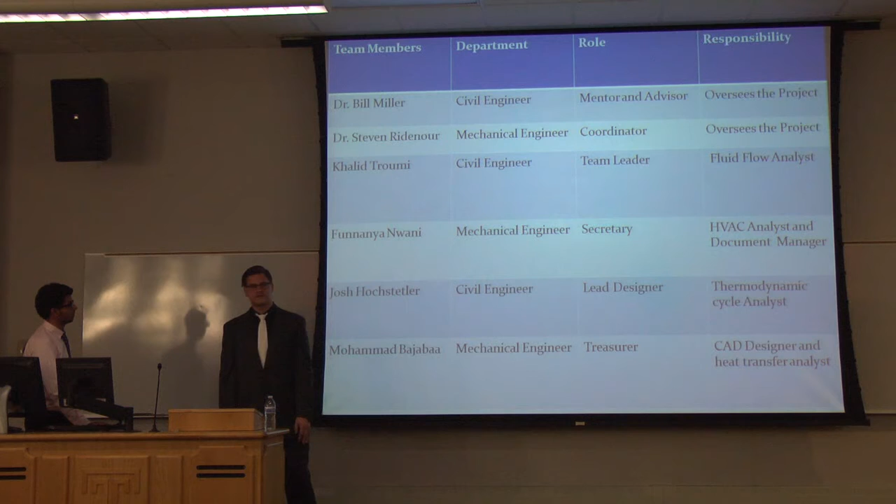One of the main challenges we've found with people who have residential driveways is the accumulation and formation of ice and snow. This normally leads to reduced traction for tires and for people walking on the driveway, and accidents happen—people can fall and injure themselves. So we decided that a heated driveway was the best solution for this problem.

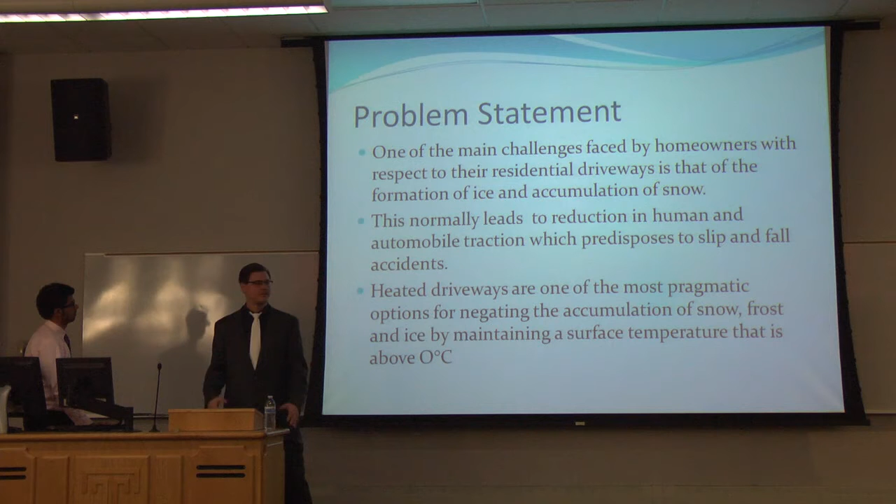We came up with a few candidate solutions, the first of which was a solar powered heated driveway system. The problem we found was that implementation is very costly, and when the solar panels aren't in direct sunlight, they don't have a very high efficiency.

The next solution we came up with was a chemical deicer operation. The problem we found was that this solution still required manual removal of the snow, even though it was supposed to solve that, and it also required spraying chemicals, which isn't environmentally friendly.

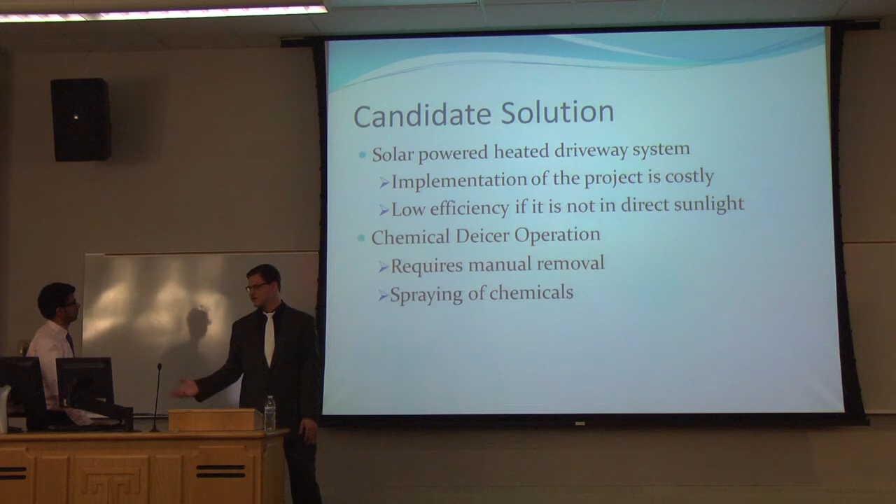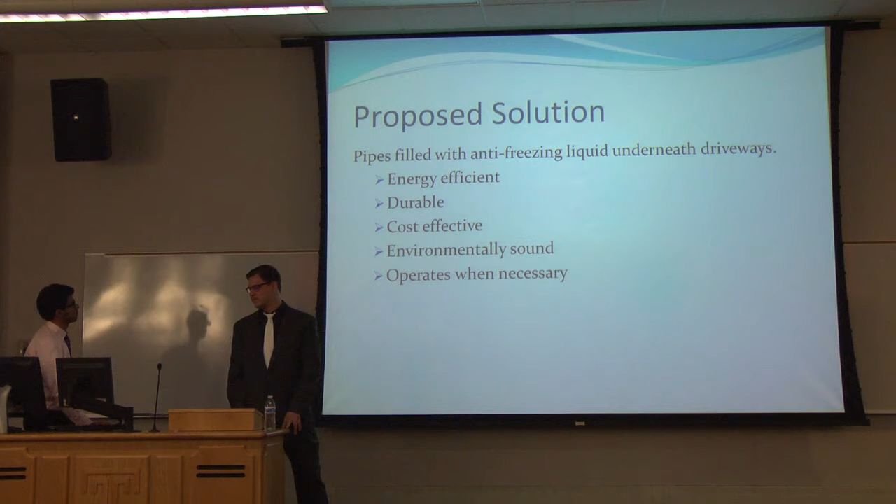So the solution we came up with was to integrate a system of pipes underneath the driveway. It would circulate a mixture of antifreeze solution using propylene glycol and water, circulating around underneath the driveway. It's energy efficient, durable, cost effective, environmentally sound, and it operates only when necessary.

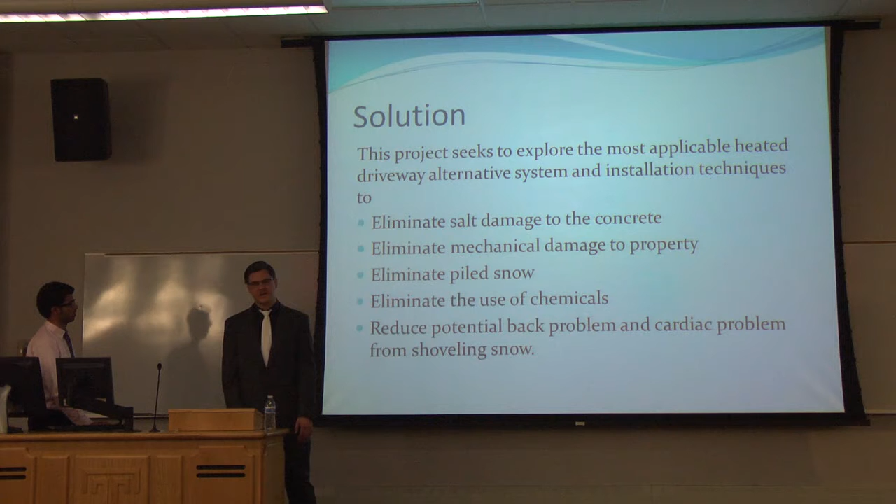This project seeks to explore the most applicable heated driveway alternative system and installation techniques. It eliminates salt damage to the concrete, eliminates mechanical damage to the property, eliminates piled snow and the use of chemicals, and reduces the potential for back problems and cardiac problems from shoveling snow.

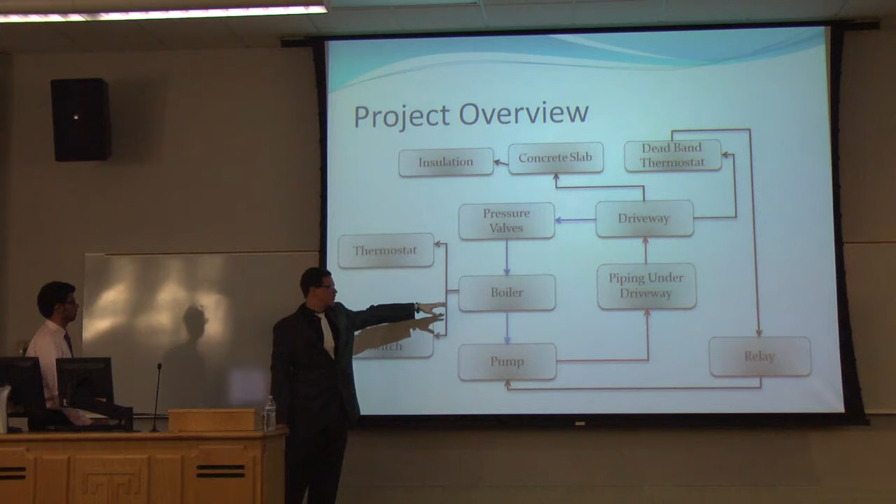This is a project overview. The whole system starts when you turn the power on—that's the main power for the whole system. Then you have the thermostat, which controls the temperature for the boiler, which heats up the fluid and sends it out throughout the system.

We also have a deadband thermostat in our system. This thermostat turns the whole system on when it gets to 31 degrees Fahrenheit and turns the whole system off when it gets to 35 degrees Fahrenheit. The reason we decided to put this into our system was so you don't have to worry about turning the system on and off yourself.

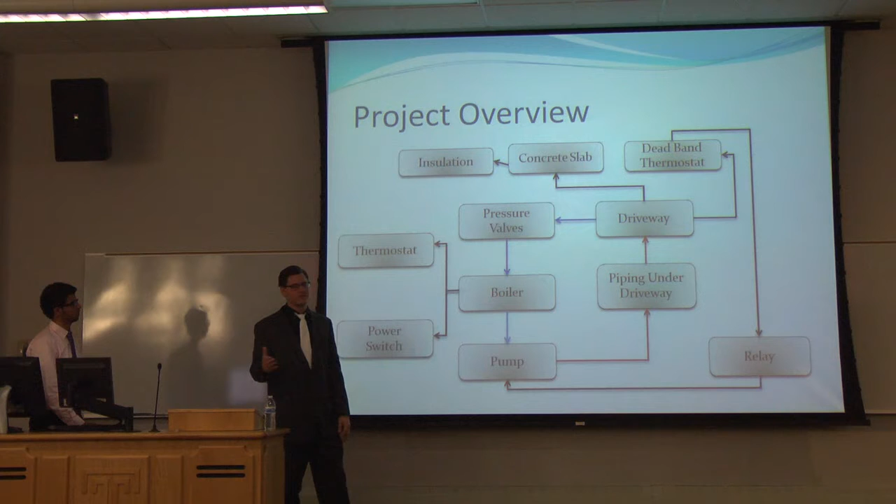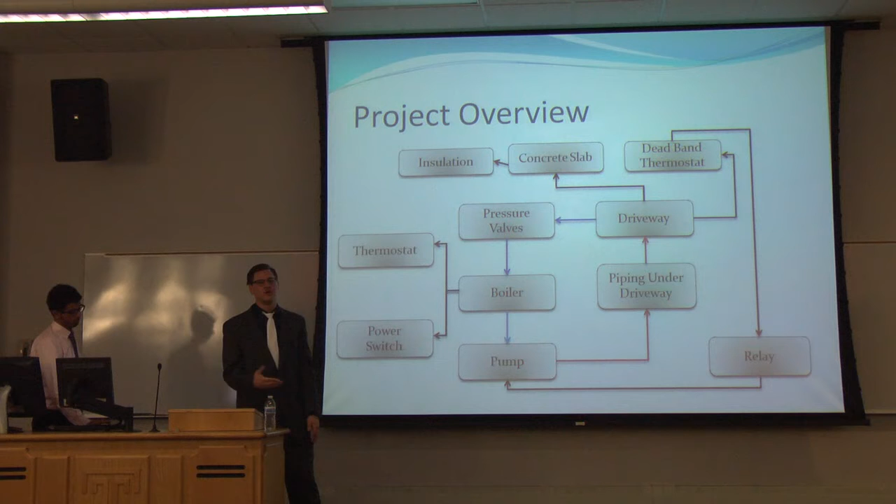So if you're sleeping and it snows overnight, it'll turn on because it has to be below freezing for that snow to stick, and then it'll melt the snow. You don't have to worry about waking up early to shovel yourself out of your driveway, or if you're at work, coming home and dealing with snow or ice on your driveway.

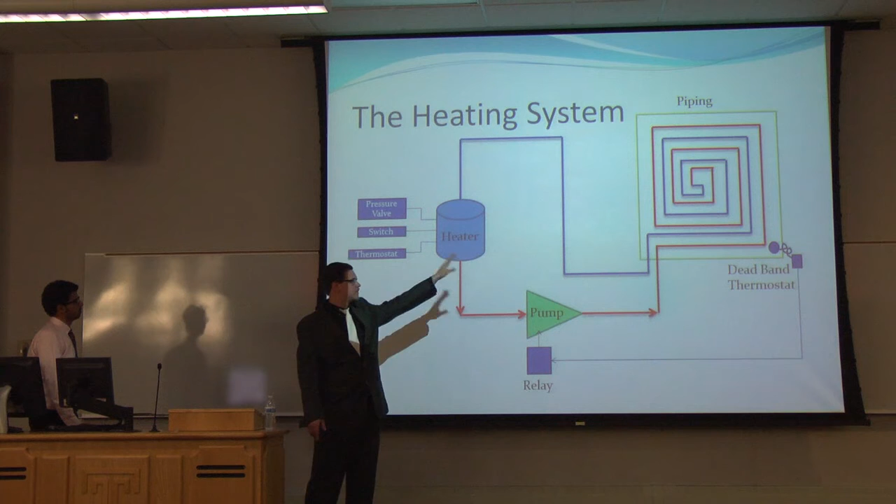This is another overview with a more detailed idea of what we're going to put underneath the driveway system. You're going to have the boiler pumping the heated propylene glycol and water solution out into the system, and it's going to circulate around, then once it gets to the center, it's going to return back.

We decided to go with that layout for the pipes because it's the best way to evenly distribute the heated solution throughout the driveway. It doesn't miss any spots, which was a problem we found with some of the other pipe layouts.

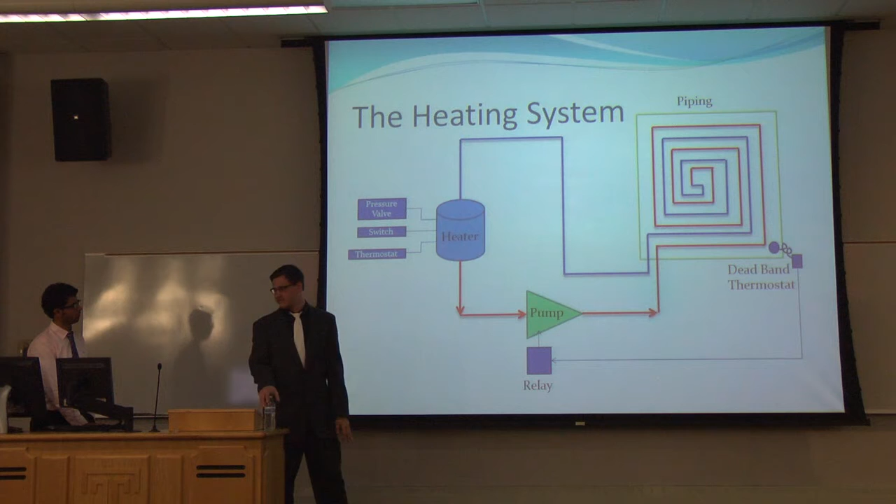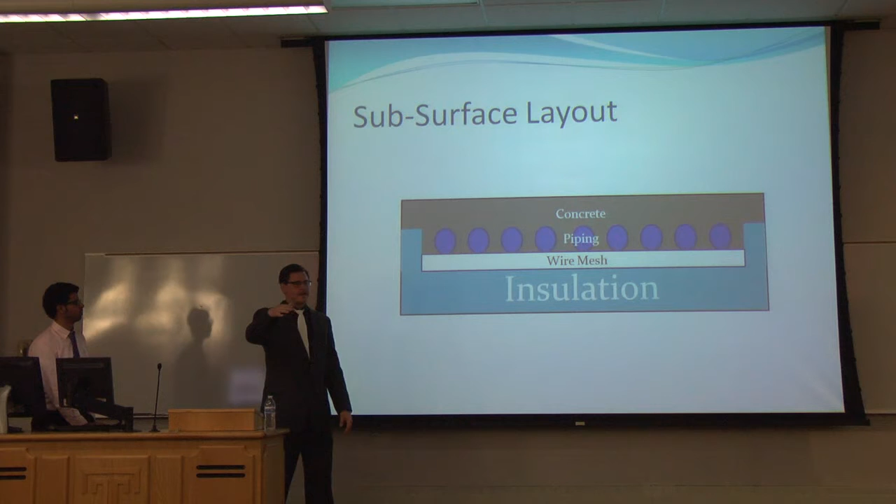This is a subsurface layout, if you were looking at it face on. On the bottom and sides, you're going to have a layer of insulation, and on top of that, wire mesh, and then the piping is going to be laid on top of that. And on top of everything, you're going to have the concrete, which would be the driveway surface.

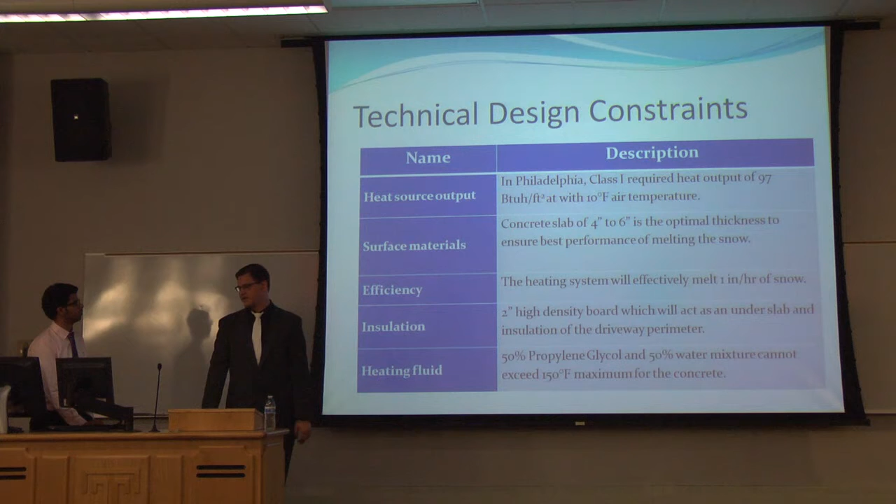For our technical design constraints, we had a heat source output, and for that, in Philadelphia, a Class 1 required heat output of 97 BTUs per feet squared, with 10° Fahrenheit air temperature required.

Our surface materials are going to be a concrete slab of 4 to 6 inches. This is the optimal thickness to ensure the best performance of melting snow. The heating system will effectively melt the snow at 1 inch per hour.

The insulation is going to be a 2-inch high-density foam board, which will act as an under-slab and side insulation for the driveway perimeter. The heating fluid is going to be a 50% propylene glycol and 50% water mixture, and this cannot exceed 150 degrees Fahrenheit, so it won't damage the concrete or the system itself.

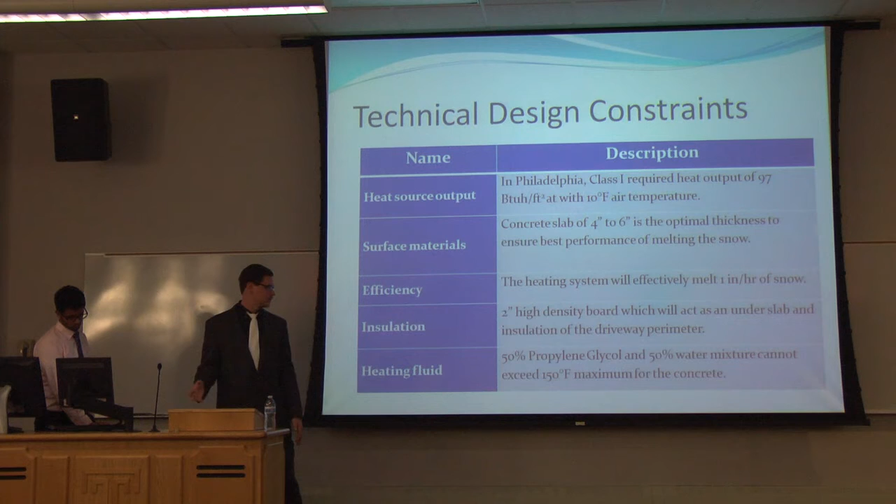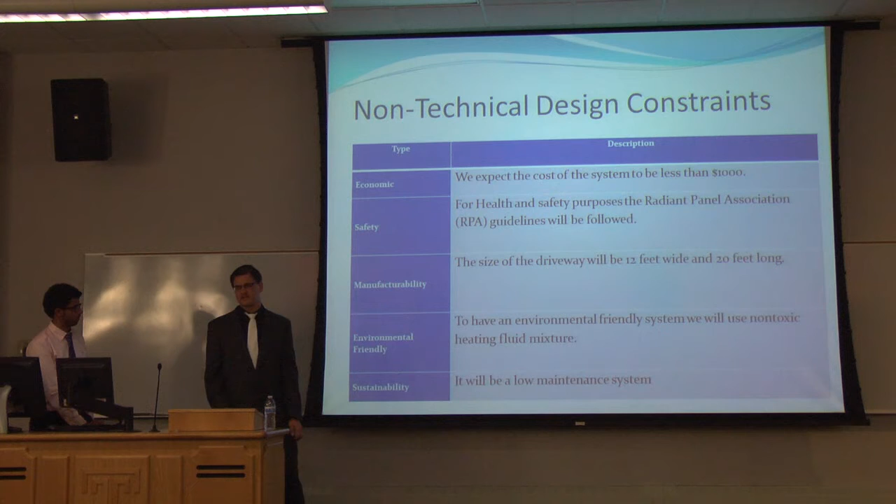For manufacturability, the size of the driveway will be 12 feet by 20 feet, and we chose these numbers arbitrarily. This driveway system can be redesigned for any width or length. It's going to be environmentally friendly, using a non-toxic heating fluid mixture, and for sustainability it will be a low-maintenance system.

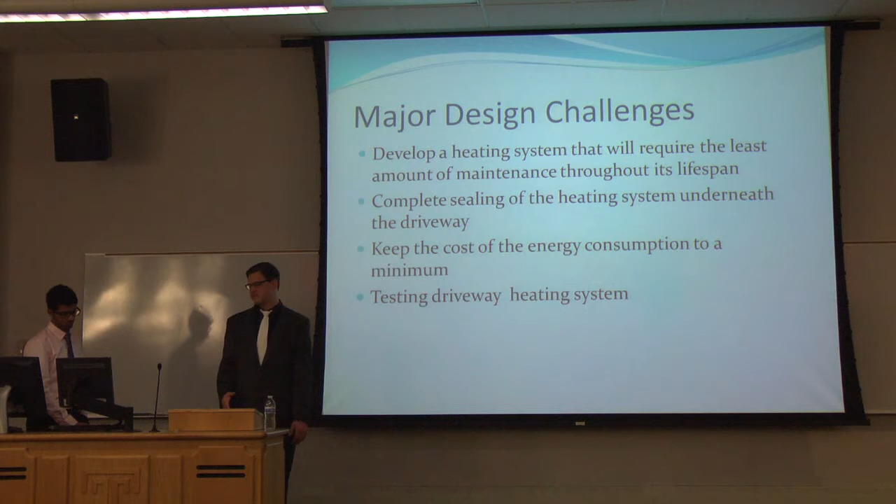The major design challenges we came up with while designing it were to develop a heating system that would require the least amount of output, or the least amount of maintenance throughout its lifespan, complete the sealing of the heating system underneath the driveway, keep the cost of energy consumption to a minimum, and find a way to test the heated driveway system.

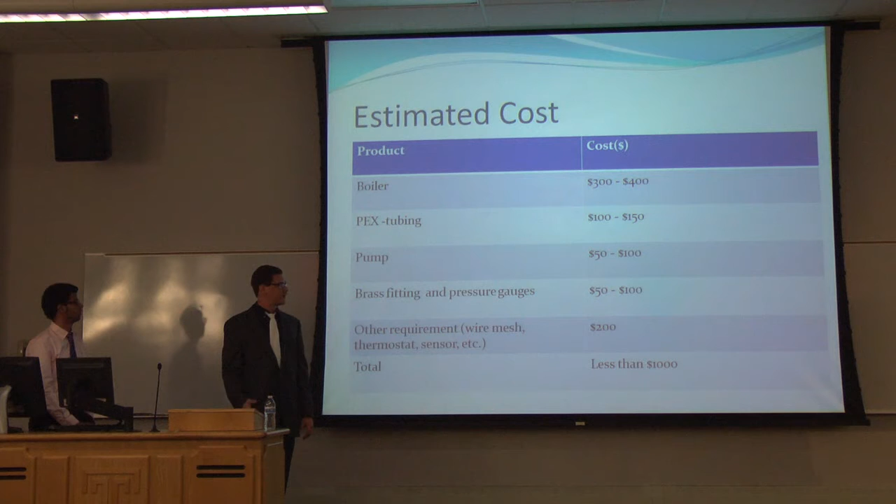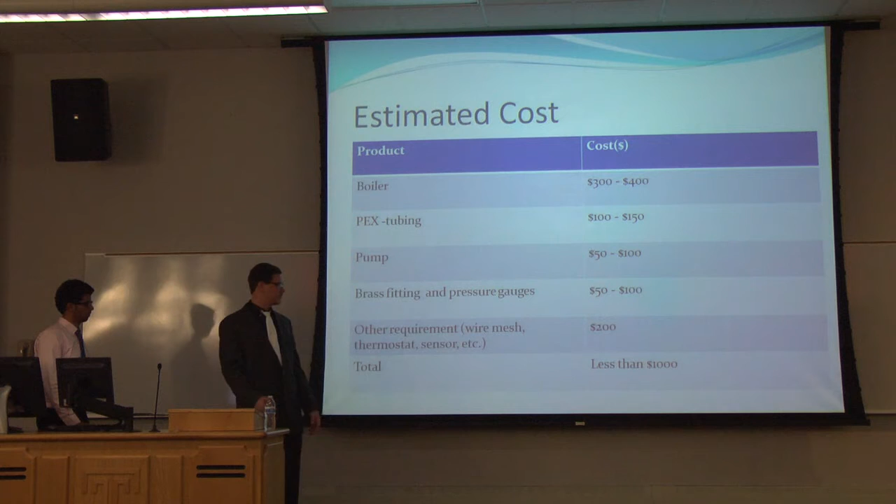This is just our estimated cost. Our boiler we estimate to be anywhere from $300 to $400. The PEX tubing, which we lay out underneath the driveway, would be anywhere from $100 to $150. The pump we found to be anywhere from $50 to $100. The brass fittings and pressure gauges would be anywhere from $50 to $100. And other miscellaneous expenditures we may need would be around $200, which totals out to be less than $1,000.

So for our approach, we found an industry-used manual that other companies use when designing their heated driveway system. It's based on the ASHRAE handbook, which is what's used. It's got a bunch of guidelines and things for systems such as this one.

The first thing we had to do was determine an outdoor temperature. For this, we decided to use 10 degrees Fahrenheit, wind speed of 10 miles per hour, surface temperature of 35 degrees Fahrenheit, and a differential temperature of 25 degrees Fahrenheit. The differential temperature is just the temperature at which the fluid is supplied to the system as opposed to when it returns to the boiler.

These values gave us a heat flux of 95 BTUs per hour per feet squared, a supply fluid temperature of 126 degrees Fahrenheit, and a 12-inch on-center tubing distance.

The total area for the system we said would be 12 feet by 20 feet, which gave a 240-foot squared area. To calculate the total BTUs per hour, we multiplied that by the heat flux, which gave 22,800 BTUs per hour, the minimum output our boiler would need to put out.

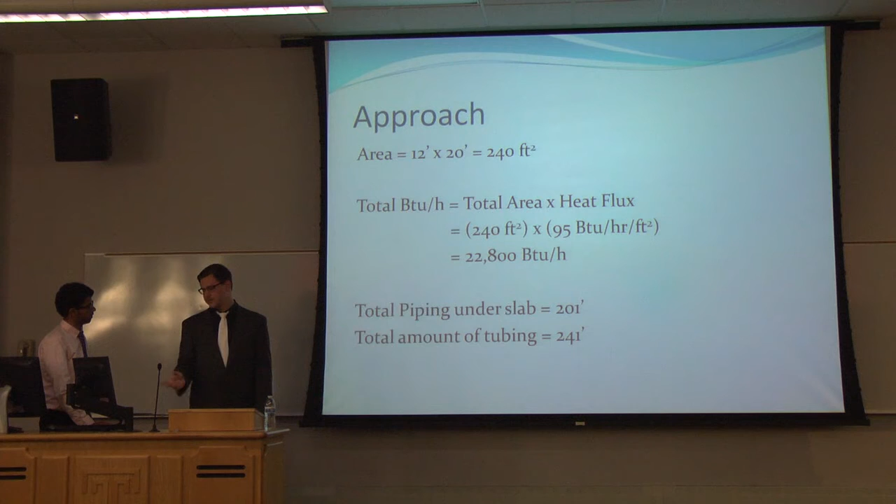So then from the book, which we didn't realize at the time but was essentially what we had just done previously, we calculated an active loop length of 200 feet, only a foot off from the total length of tubing we had calculated, which was 201 feet. This gave us a number of loops of one loop and a total header length of 20 feet, which we didn't realize at the time should have been multiplied by 2, since it was 20 feet going in and 20 feet coming back out. So the book would have given us a total loop length of 240 feet.

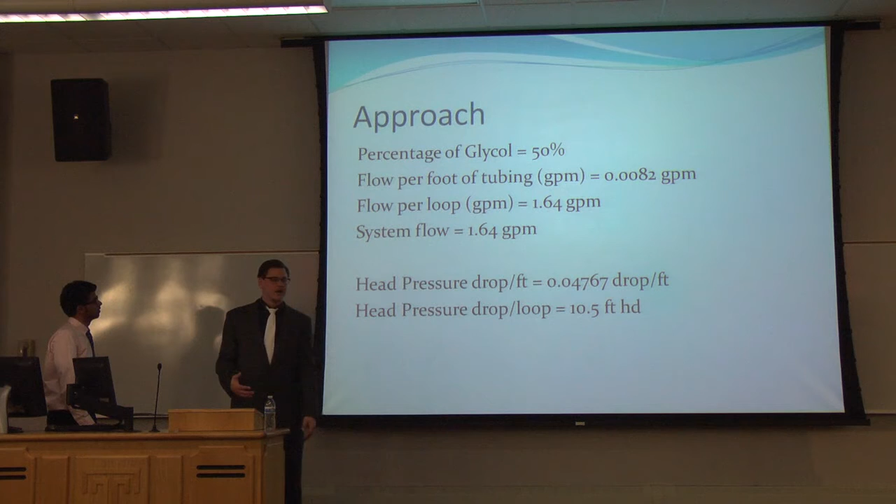We used a 50% glycol solution because the way it mixes with water gives a better temperature for us to use.

For the flow per foot of tubing, we calculated 0.0082 gallons per minute. The flow per loop would be 1.64 gallons per minute, and the total system flow would also be 1.64 gallons per minute.

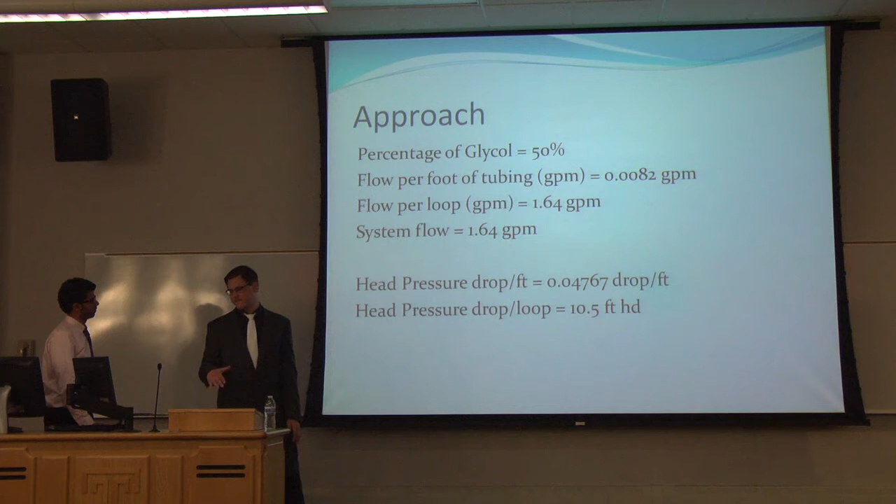The head pressure drop per foot would be 0.04767 per foot, and the head pressure drop per loop would be 10.5 feet of head.

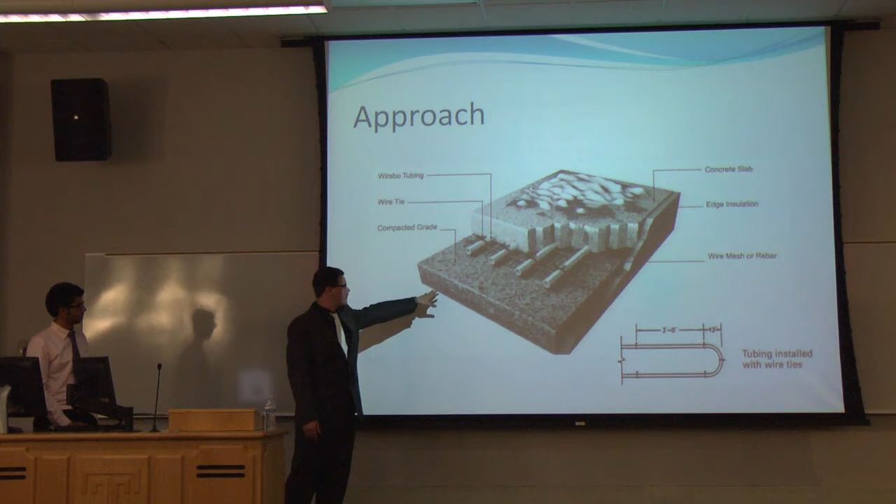This is a more detailed picture of the subsurface layout we had. You can see the ground, then on top of that the insulation, then the wire mesh with the tubing tied down to it, insulation on the sides so you don't lose heat out the side, and then the concrete laid on top.

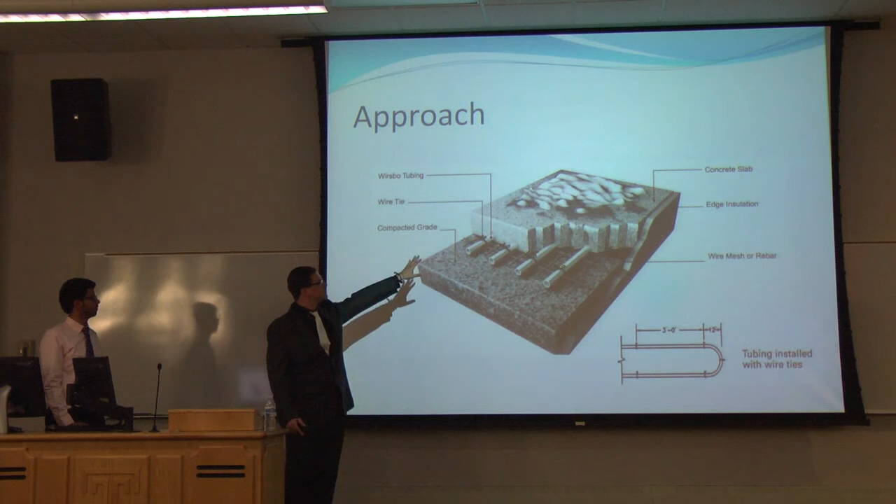For summary, for Senior Design 1, we finalized our design layout, got more familiar with each part of the system, completed most of the required calculations, and came up with a full budget analysis.

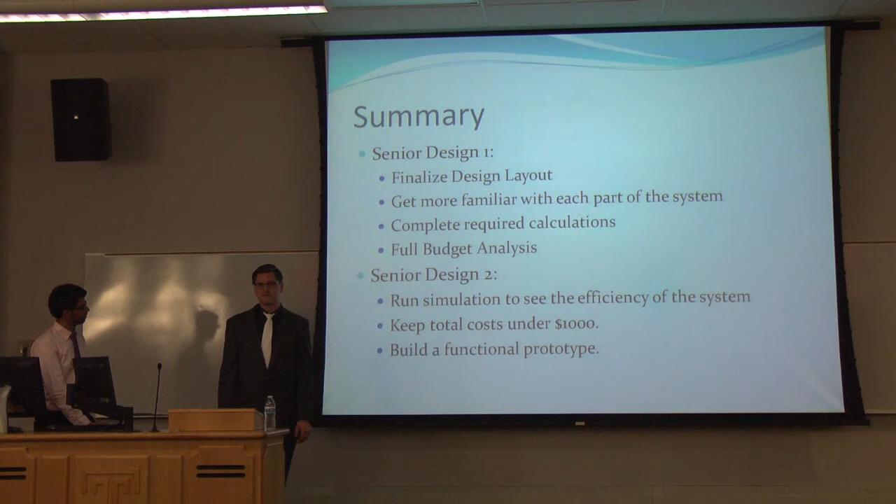Over the summer and for Senior Design 2, we plan to run a simulation to see the efficiency of the system, keep the total cost under $1,000, and build a functioning prototype of the system. Thank you for your attention.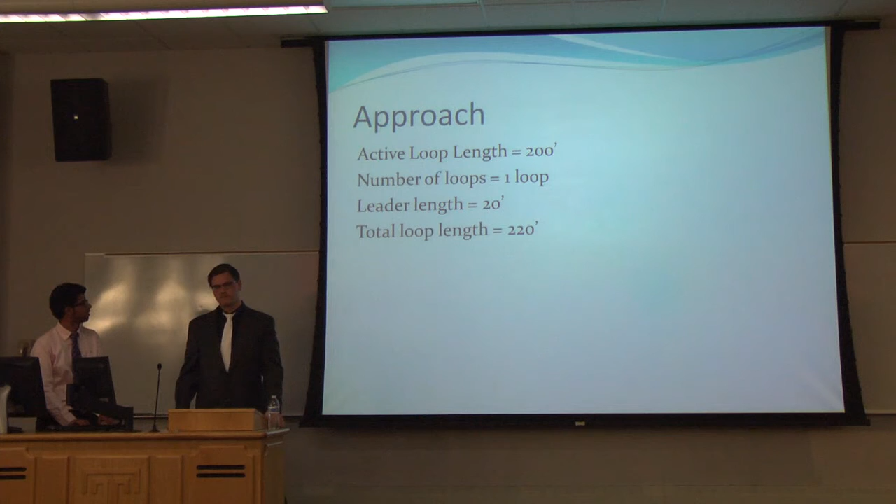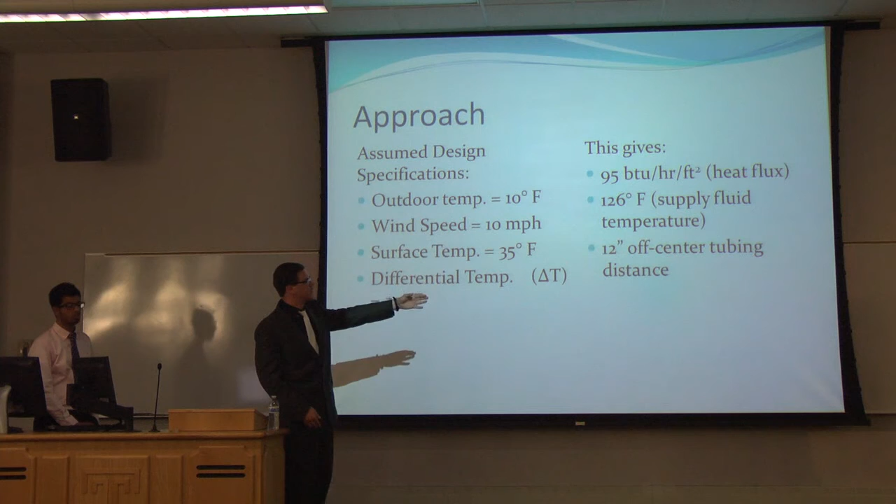Regarding the calculations on temperature: the surface temperature was 35 degrees Fahrenheit, and the fluid inside was going to be 126 degrees Fahrenheit coming into the system, with a differential bringing it back at 101 degrees.

How did we come up with 35 degrees given 126 degrees Fahrenheit? We just picked that number arbitrarily. Since the freezing temperature is 32 degrees Fahrenheit, we had to choose something above that to melt snow, so we chose 35. The manual we used said 34, but we used 35 to give a little extra margin. It wasn't a calculated number, just one we picked.

When you have a given fluid temperature of 126 degrees Fahrenheit and a 4 to 6 inch slab, what is the temperature drop through the slab? To be honest, I'm not really sure. The manual we used was based on the ASHRAE handbook, which uses a lot of advanced thermodynamic equations we're not fully familiar with.

Another point raised: surface temperature depends on fluid temperature and flow rate. If your flow rate is low, the surface temperature may end up much lower than what you want, or if too high, it could end up much higher. Without the right equations, you may not achieve the control you need. We'll take a look at that.

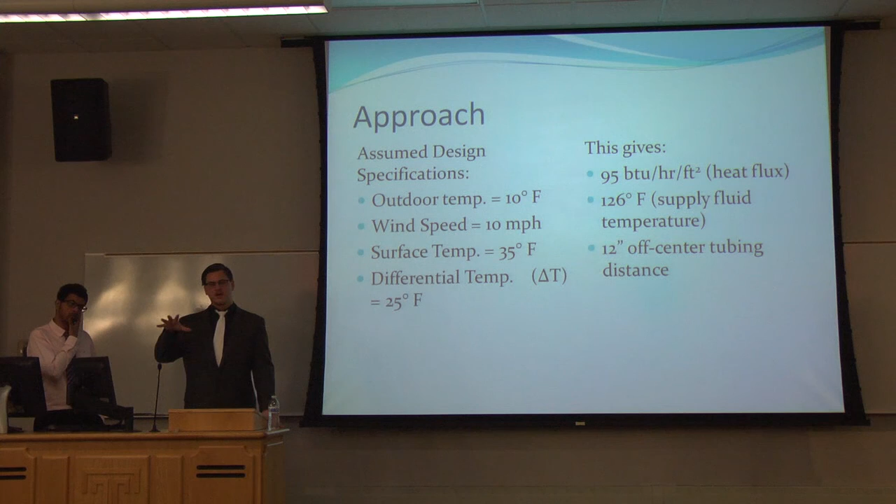It depends on where you put it. For our purposes, we just designed it as if it was right there, didn't need anything else, but it will be part of the calculations if you want to find out the overall system efficiency.

Any questions? We still have 2 minutes. Okay, I'll ask a question now.

When you have your thermostat's dead band, the thermostat, when the temperature goes to 31 degrees, it will turn on the system. Now does it check for the existence of snow or not? It won't, and the reason we decided to do that was because it's 2 civil engineers and 2 mechanical engineers - we don't have a lot of electrical help on this one, so we weren't exactly sure how to get something that would detect moisture in the air. Also, if it's just detecting moisture and not temperature, then if it's above 32 degrees you have to worry about that too. We weren't exactly sure how to incorporate the moisture aspect.